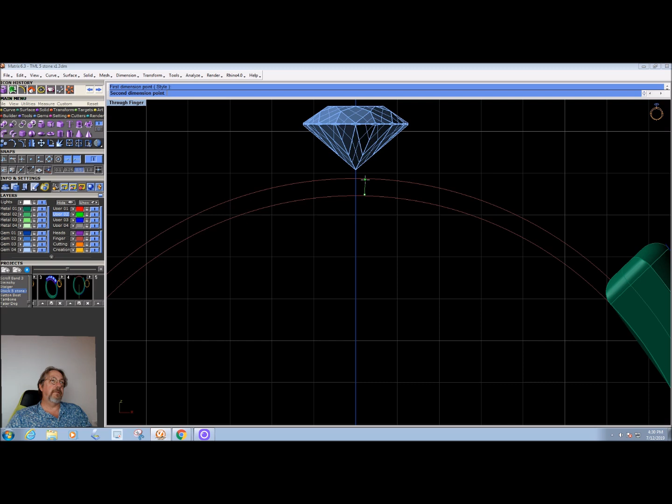One of the things I always do with rings like this is take my original ring rail, which is a size 6.5, and add one that's one size bigger. I make sure the culettes of my stones are always off of that, so that if I had to grind a half size or full size out of this, I wouldn't actually have to cut the ring, because this difference is actually pretty minimal, way less than half a millimeter.

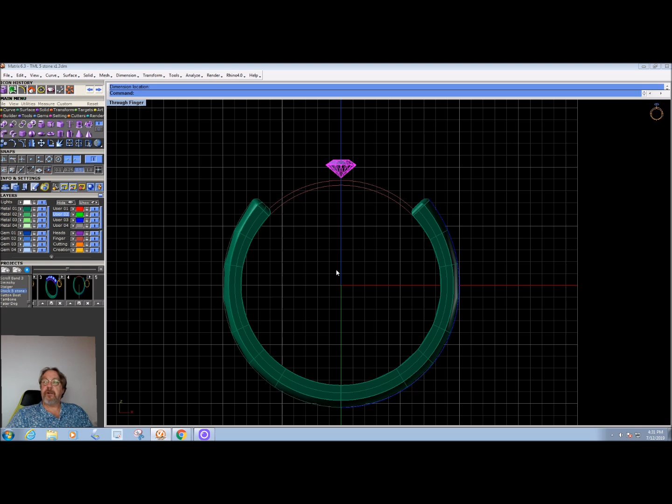So I actually think it's better sometimes to tap or grind rather than cut, if you're only going up a little bit, especially if this was a ring where the diamonds went all the way around. You'd have to either add a whole diamond or completely rebuild the ring. But doing it this way saves a lot of energy if the customer comes back in, maybe they've gained weight, or they're pregnant, or they want to change the finger size or something like that.

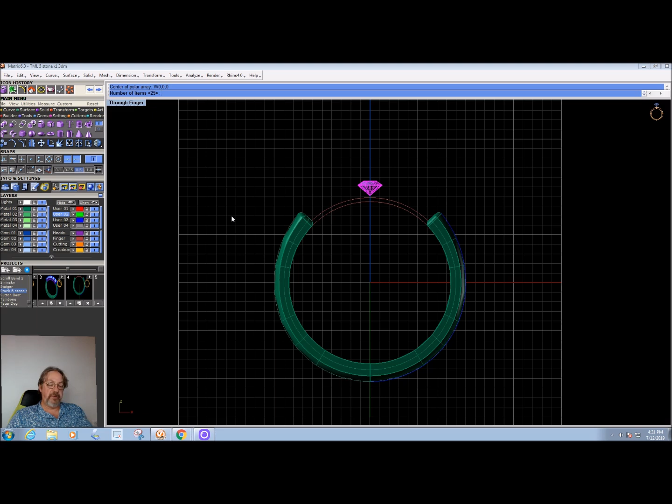So first we want to act like we're going to build this all the way around. I already know from the center polar array that 25 is the right number. Odd numbers are great for doing this because I've got a gap down at the bottom and a stone centered at the top.

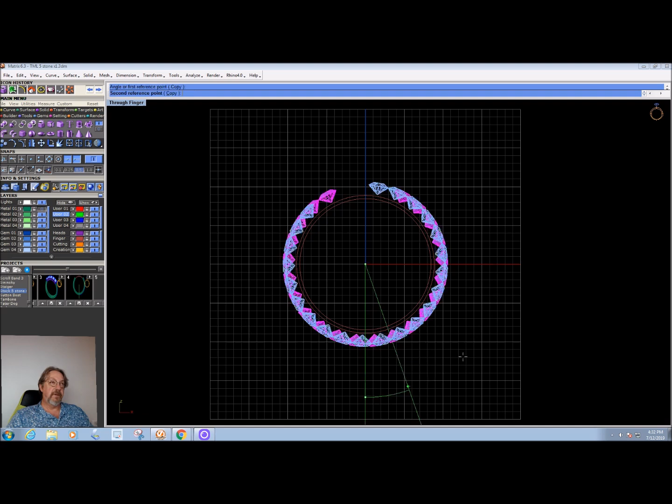The first thing we're going to do is turn off our shank. Then we're going to drop these for the moment - I'll actually be dropping a bunch of these soon. I'm going to rotate it upwards like this, and then we're going to build a prong.

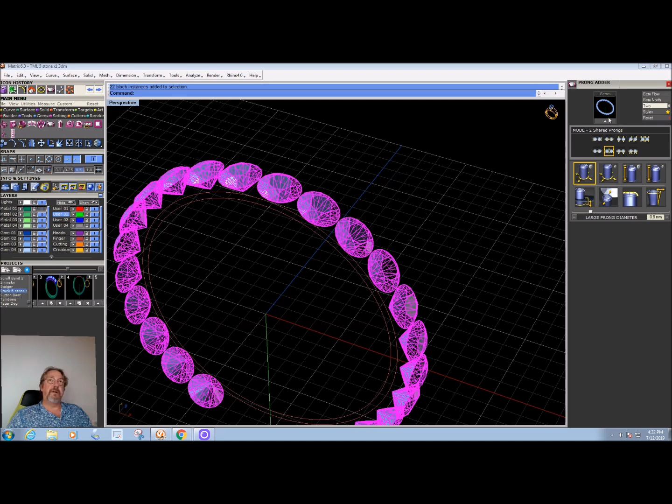Now, if I go in and use the Gem Vision Prong Builder tool - it says Prong Builder here and Prong Adder here, whatever - I'll throw these in here. We get these things, and you can play with them, but I think they're rather insufficient for holding anything.

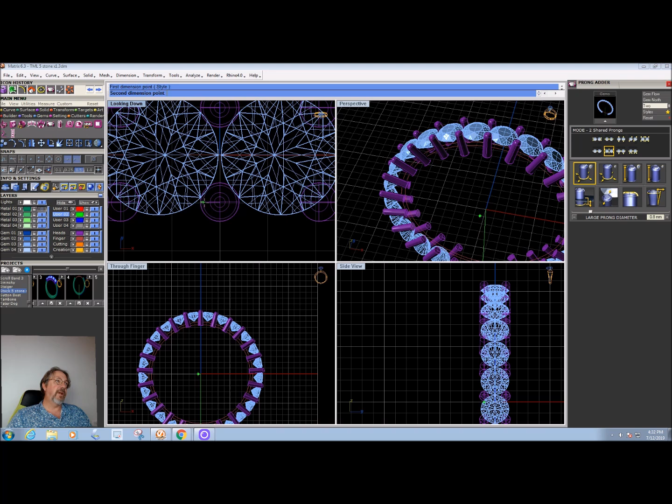We're looking at a diameter of metal that's, if we're lucky, 8 tenths of a millimeter. That's pretty insufficient in my mind, plus there's a lot of chance for porosity or casting failure in there.

So what I like to do is center up here and do an oval. We're going to turn on our grid snap, pop right to that grid, and do an oval prong like this. It doesn't look severely oval, just a little bit oval. I'm going to make a second one just like that, and then make this one a little bit bigger.

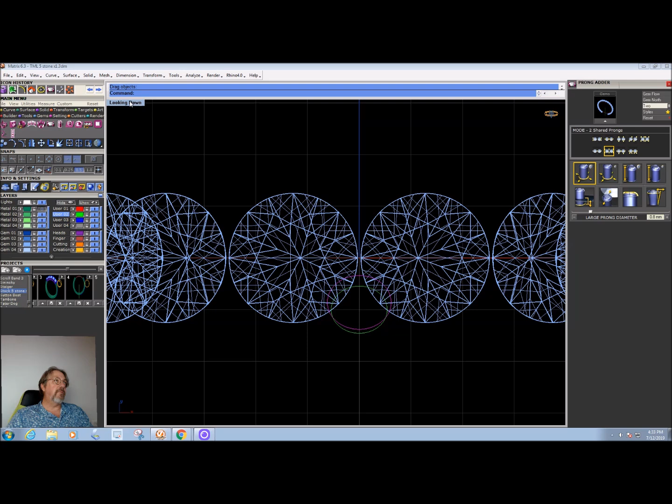And then I'm going to slide it in like that. We'll take these, and the base one, which is a little wider, we're going to slide up underneath our ring rail, and this one we're going to slide right above the table.

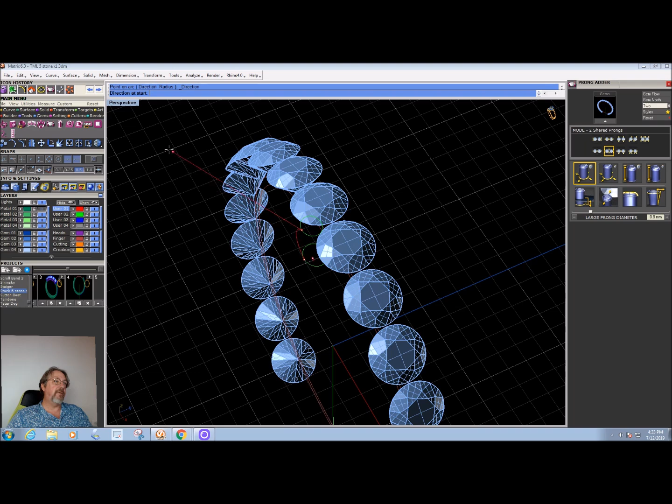And then I like to have a little arc to this, so I'm going to pop that and that with an arc tool and put just a little bit of an arc there. Then we will sweep surface 1 from here to here.

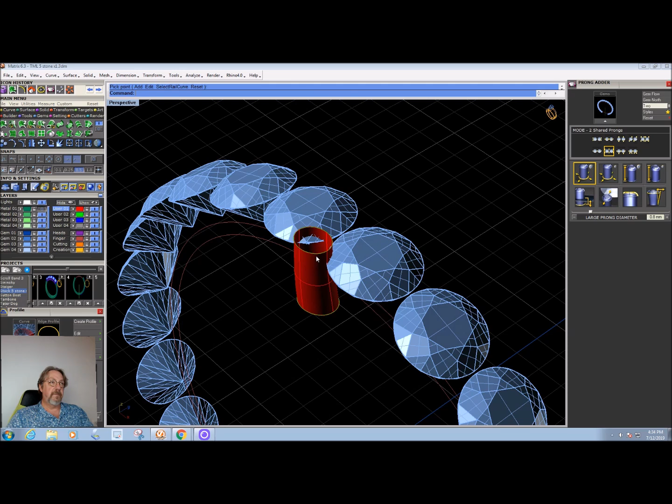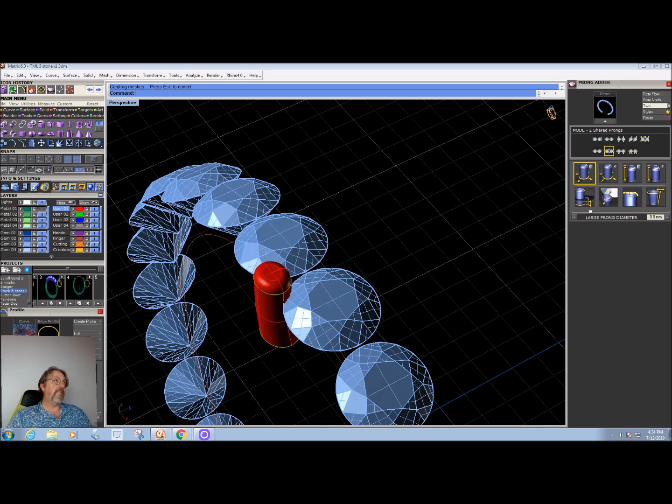Alright, so I like this because since it's a little wider at the bottom, I think it's easier for the metal to flow up. Since it's oval, I think it's easier to hold the two prongs. And honestly, once you finish it, I think it looks as good or better than any of the prong adder prongs.

So I'm going to take this - I guess the first thing I'm going to do is cut the finger rail off of it.

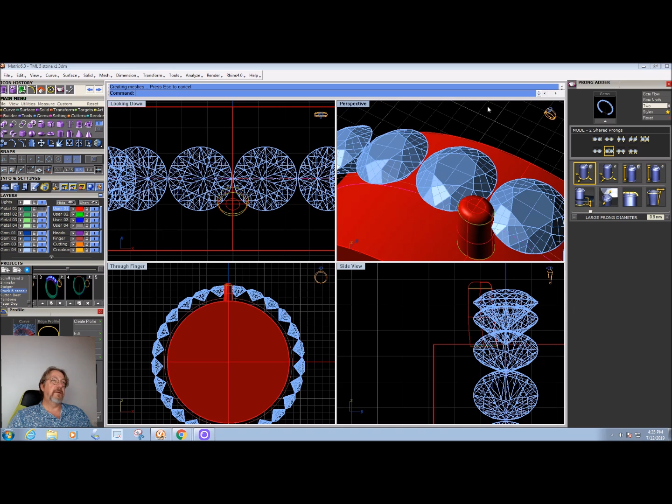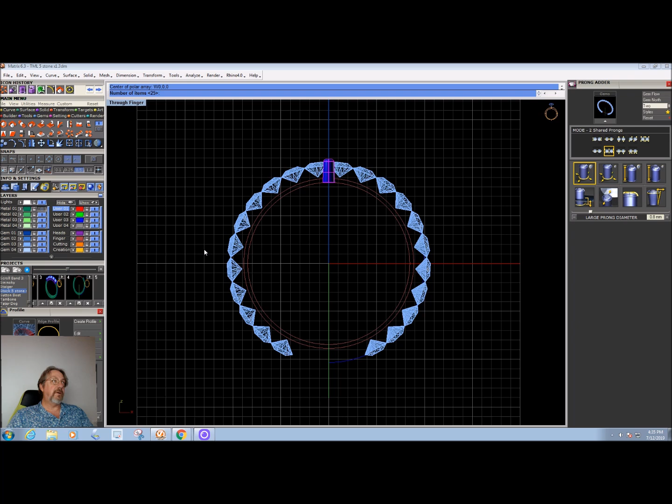Turn this blue. Now I'm going to transform by 4, 25. There we go. Look at those prongs, it's gorgeous.

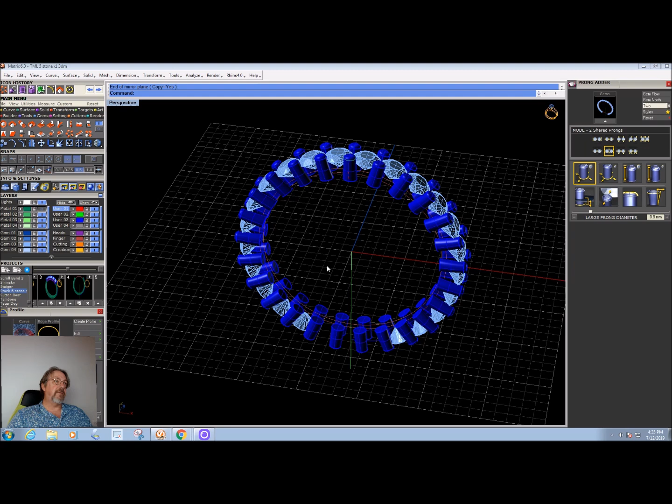And then we'll mirror them over for here. Now what I'm going to do is turn all this off and go back to my... turn it on. Actually, I'm going to flip this around. Turn these guys off. Oop, sorry, I need one. That one, so I'll get all these off.

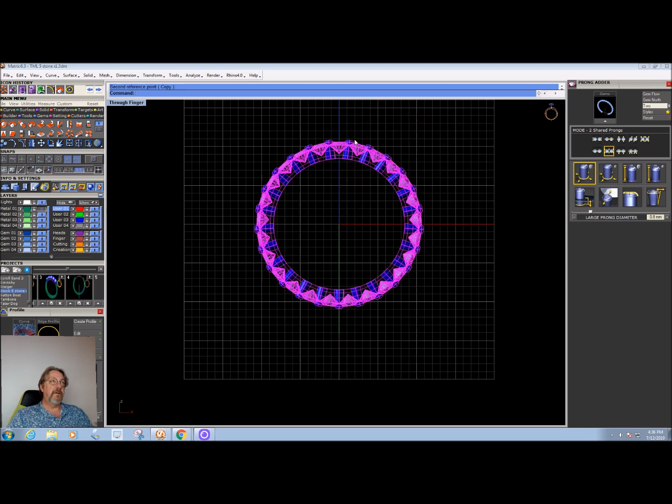Transform by 4. Alright, so now we're going to take and flip this entire thing over. And the reason I deleted those 3 on the bottom was so I could see what I was doing. That's the only real reason.

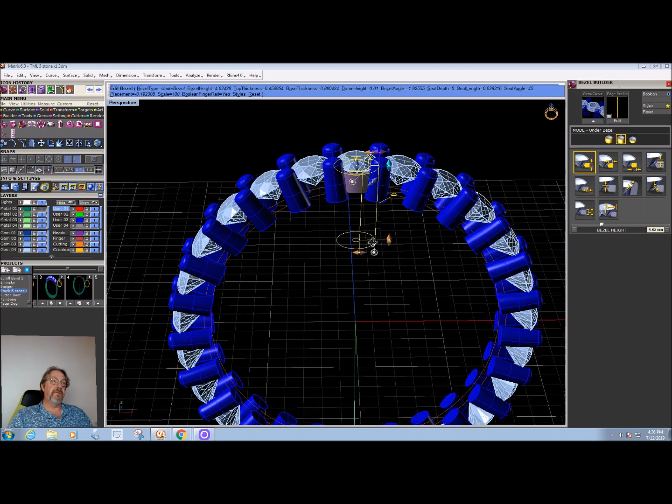So now we're going to go into one tool I do use, which is the bezel builder, although you don't have to. So we're going to throw this in here. I need an under bezel. There it is. Now the one thing I got to do here is delete my extra piece, my extra rail. I want this to come out a little bit.

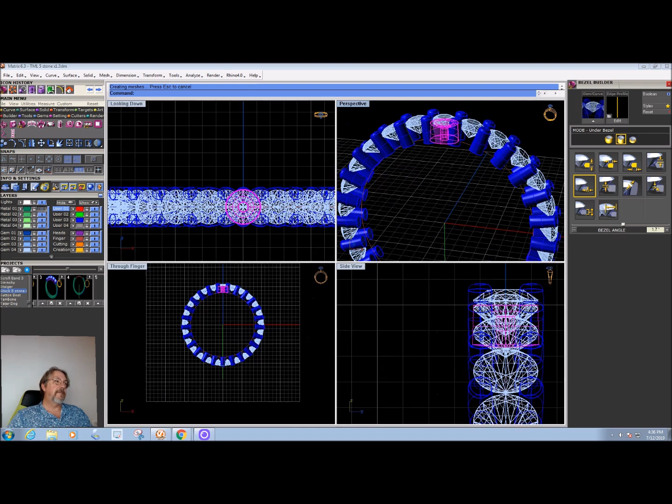Enter. I'll take this, which is a little heavy, but it's alright. And again, transform. And there we go.

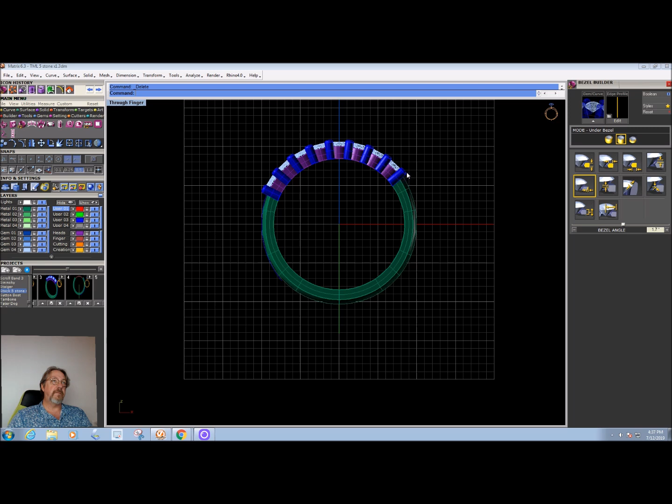So we're going to turn our shank back on and just delete all the ones we don't need. Oop, need that one. Alright. And so there we go: 1, 2, 3, 4, 5, 6, 7. Gorgeous little 7-stone ring.

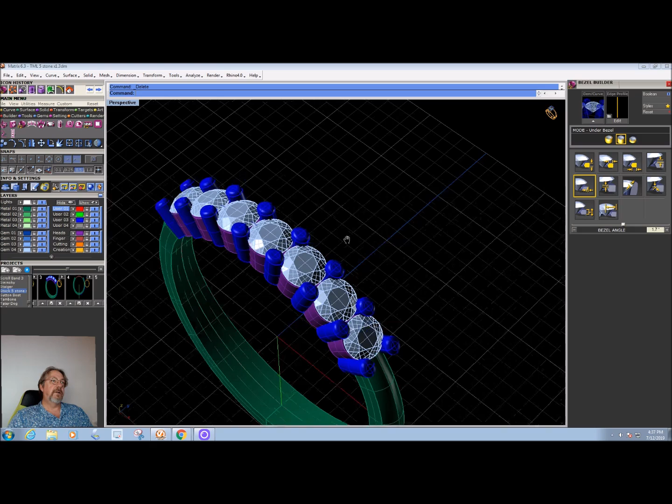I think this will cast quite well. I probably could fill this in here, but I don't really think it's necessary because we got plenty of overlap. So that's how I would do that.

Alright, Gary, let's see how you would do it.

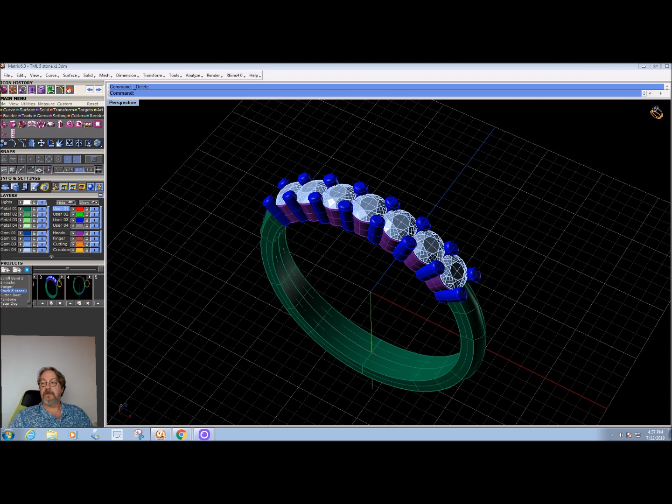Hey Joel, thanks for the handoff. I think this is probably going to end up being my favorite project of all the ones we've done so far.

I note that you started out with the shank already made, finger-sized curve and a gemstone, so I'm going to start out the same way.

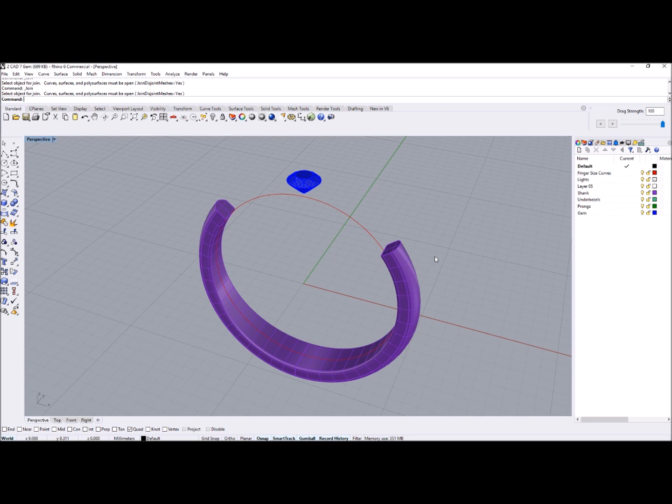In addition to that, over here in the panels, in the layer tab of the panels portion of the Rhino screen, I've created some layers too, and hopefully as I work through this I will remember to put stuff on layers so we get that nice colorful finish differentiating the components of this.

So I'll get started right away here. I'll pop over to the top viewport, use the circle command with grid snap on to make a 2.5 millimeter circle, then come down to the front viewport, and with the quad OSnap tagged, I will create a polyline that starts at the quad, and then use relative position in Rhino, relative negative 0.5 for thickness with an angle of 41 degrees.

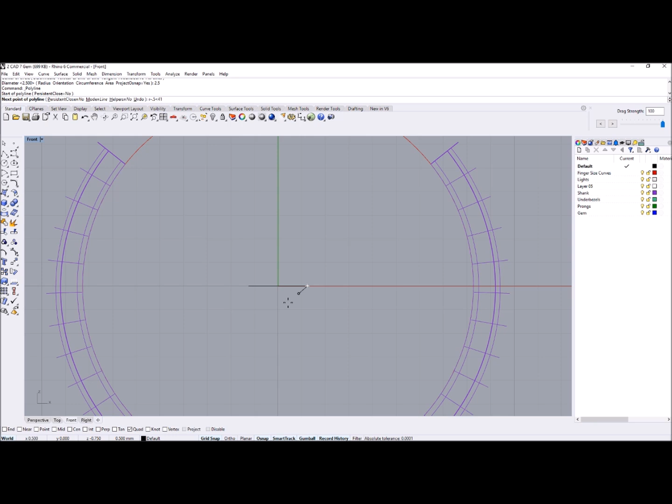Note that this automatically positions the second control point in this polyline at the same pavilion angle as a round diamond's pavilion. So this will make a perfect seat for that stone.

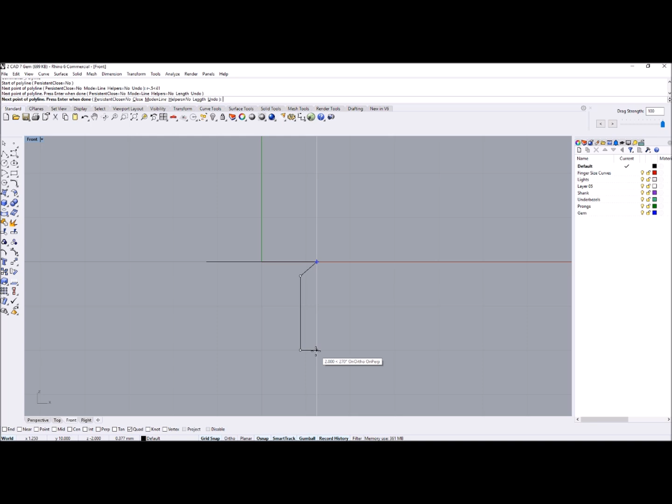Now if I shift constrain down here a little bit farther than I know it's going to need to be, and then turn on... I see Smart Track is already on here, so I'll hover over this point until it lights up, and that brings me a positional indicator here and a snap to, so that I am perfectly vertical from that quad position, and then I will come back up here and tag that.

Then I'm going to play with this shape just a little bit before I proceed, and that means I'm going to explode this. I'm going to rebuild...

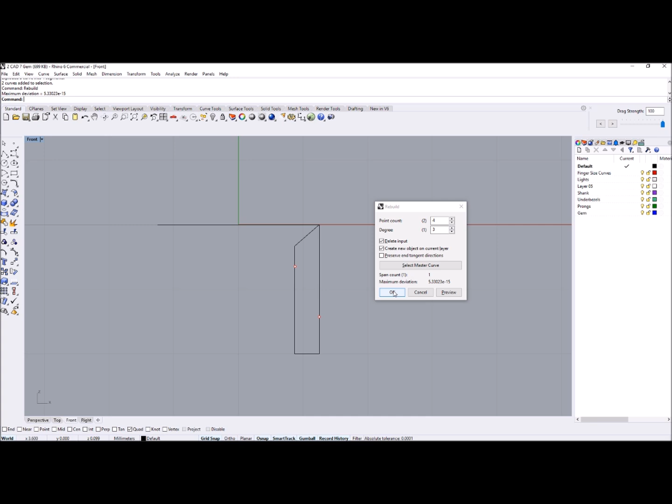These two lines, rebuilding from 2 control points to 4 for each of these lines with a degree of 3, which is going to give me the ability, once I turn on these control points, to bring this out into a smooth arc.

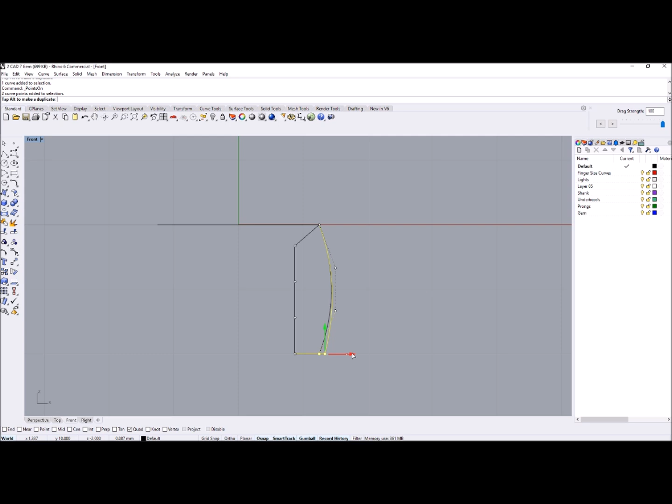And I had grid snap on there. I'm going to turn control points on to this line too, so that when I turn off grid snap and grab all of those control points, I can just bring this out just a little bit more. Yep.

And maybe we'll just continue to play with this just a little bit, to give this little barrel-like bulge that I want to do, and create just a little bit of tuck down here. You can play with that indefinitely, but let's accept what we got there.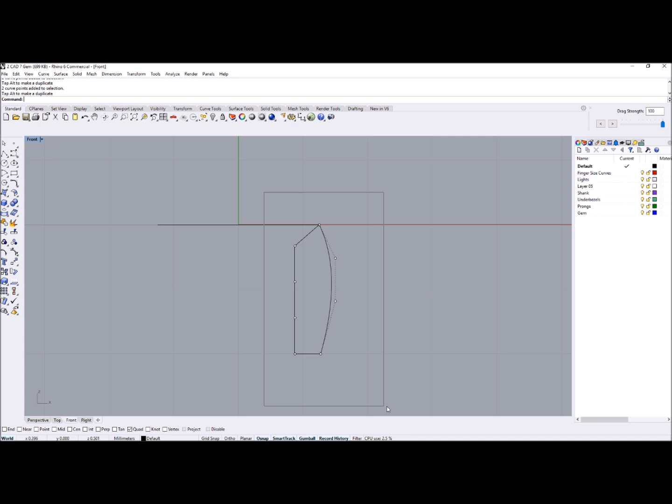I'll control join them back up, and then I will use the sweep one rail command, using this as a cross section to go all the way around that curve. And let's go ahead and put these

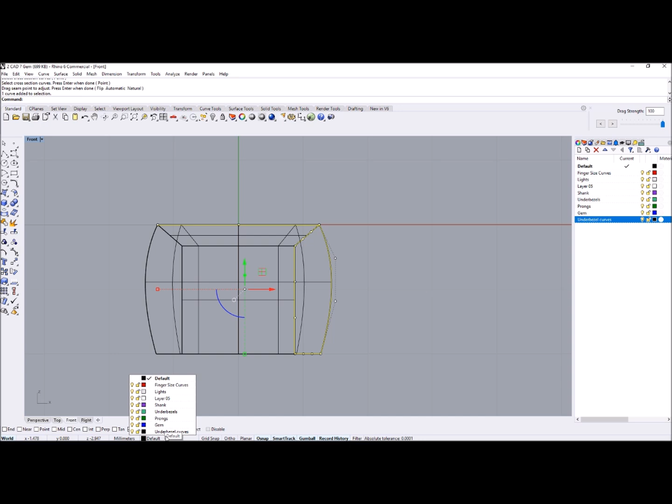curves on an under bezel curve. I didn't make that yet, so we're going to make a layer really quick. Under bezel. Boom, sorry about that. Under bezel curves. And we can then hide those because we really probably won't need them anymore.

Let's go down into perspective. And now I'm going to do one more thing here, two more things actually. We'll put that on the under bezel layer, and now I'm going to use the solid command to fillet edge, and I'm going to fillet this to 0.03 millimeter radius. Let's try that.

And I want to chain the edges, so all I have to do is touch this once, click on through to accept, and now I have a little bit softer edge on that, which I like, and it creates for a little better castability, I think.

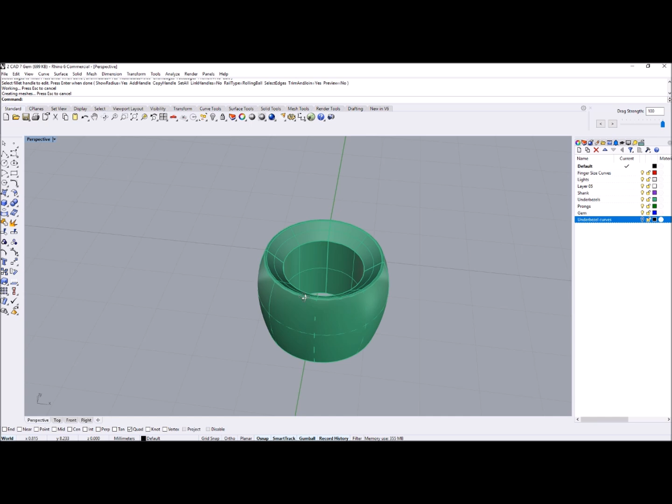Okay, let's come here, turn grid snap back on. In the top, we can just pull this down so that it's perfectly positioned underneath the gemstone, and we come to the front, and we can pull it up so that it actually acts as the under bezel.

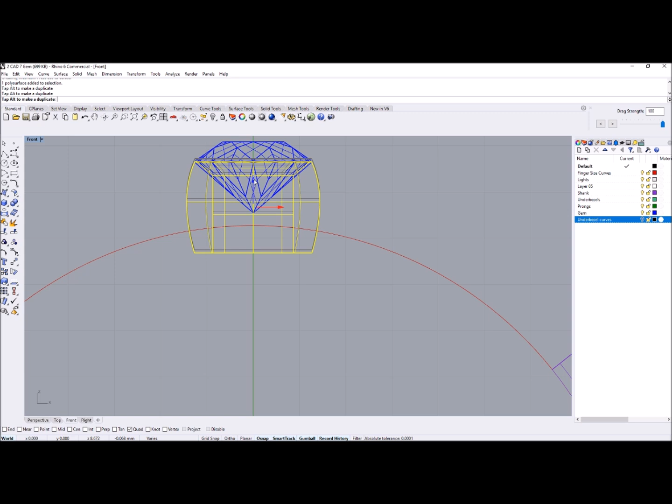See, oops, maybe what I need to do is turn off grid snap and pull that down to just right there, right at the girdle, right where it should be. Okay, perfect. And this does extend down into the finger space right now, but that's really not important at all.

Let's select these two things, and let's turn off our shank, and we can turn off the finger size curve. We really don't need it right now.

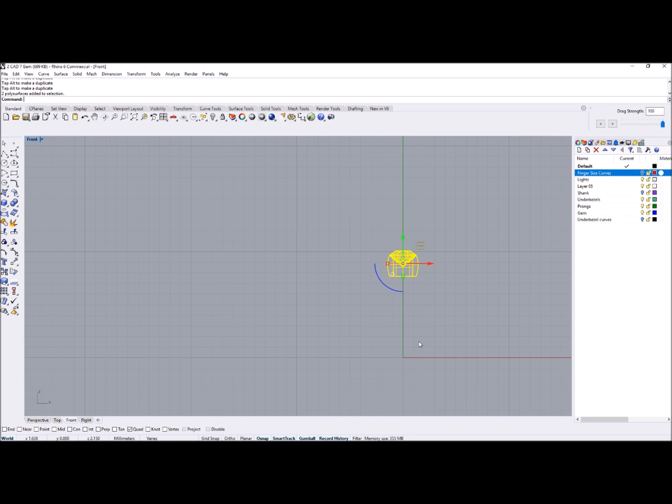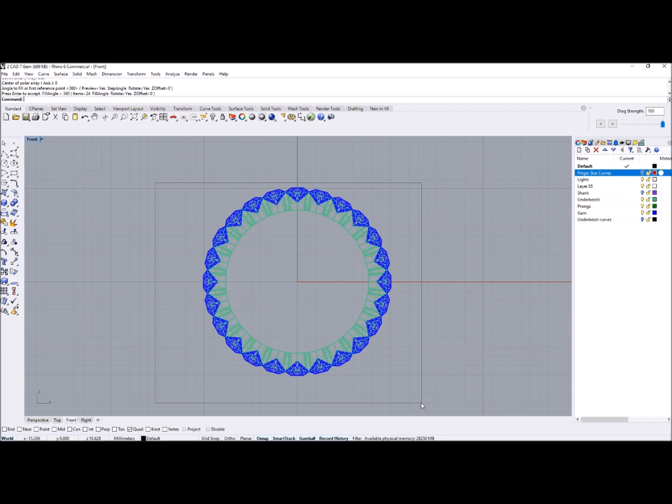And I like your polar array idea, so we'll do a polar array from the zero position, and I know that 24 is going to fit around here. I must have made my ring size a little smaller than yours, Joel, because I think you had 25, I have 24. But part of that is to explain that it really doesn't matter in this case whether we have an even or an odd number of stones. You can build this around any finger size basically, as long as the stones are going to fit around there.

And this is the slickest trick that I learned while working through this process of making this video. Something I knew existed in Rhino, but this gives me an opportunity to use this in a different way. If we touch the control or the rotate curve here that's built into the Rhino gumball, we can just move this manually wherever we want to, right?

So we could try and line this up so that it's between the gemstones, and we might be able to do a pretty good job. But there's a much more precise way of doing that.

And because Rhino does math, we can touch this, and we know we have 360 degrees in a circle. We've divided that by 24 sections, that's the gemstones that we laid up in there, right? But we only want to go half that distance in our rotation. So we do times 0.5 and watch what happens.

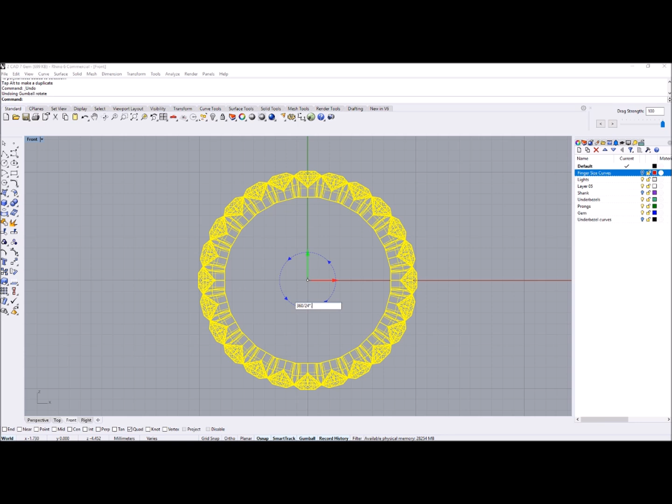Did you see that? Rhino rotated it, which I know is going to be 7.5 degrees because I can do math too. But if you have a more complex problem, you can just let Rhino work out the math for you, and that gives you the exact in-between position.

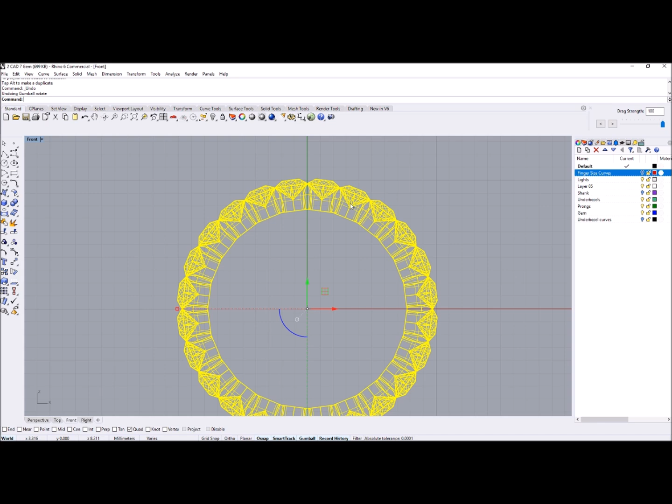It's rotated this whole thing to the exact in-between position, so that now we can go to the front or the right viewport and use the construction plane to build a curve.

Let's make sure that I don't have any O-snaps or grid snap on. I don't want that. So we're going to start just a little above the stone here, and I'm going to give myself 3 control points.

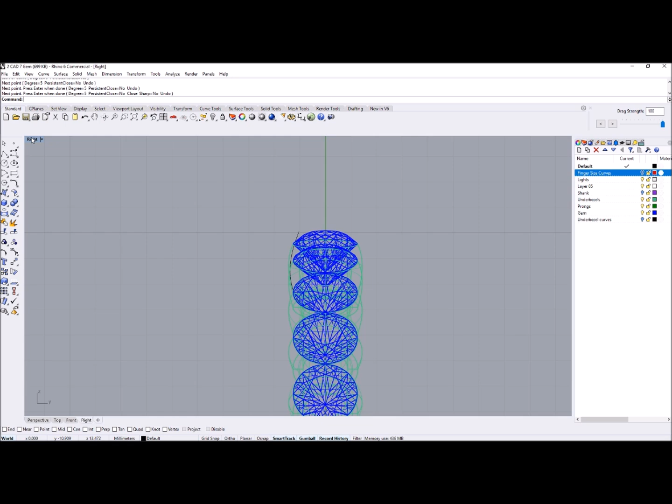And I want a little tuck underneath just a little bit here. So we've got our 3 control points. I'll end the curve there. Let's go into the perspective viewport again and see what we've got.

Okay, let's pipe this. I'll use a pipe with round caps, and we'll do 0.3 at the top, 0.4 at the bottom to give it the taper, which I really like your idea about, Joel, a lot.

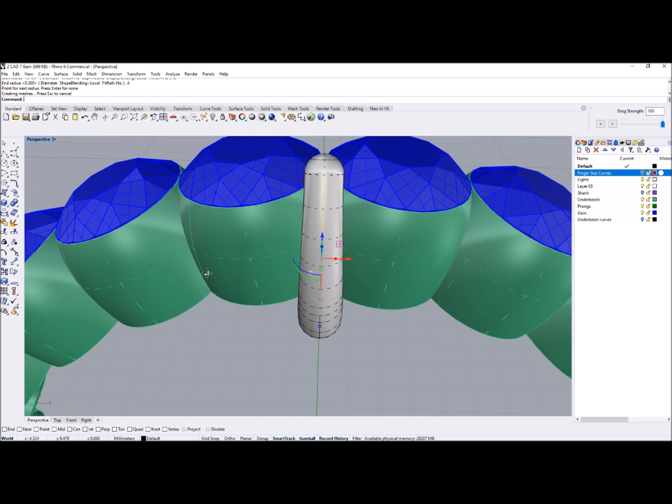I don't really want to work with this curve anymore, so I'll just delete it. Let's work directly with this. I love your idea of making this a little bit wider, so we just stretch it in the x-axis here a little bit. Let's pop back over here and see, we want these prongs.

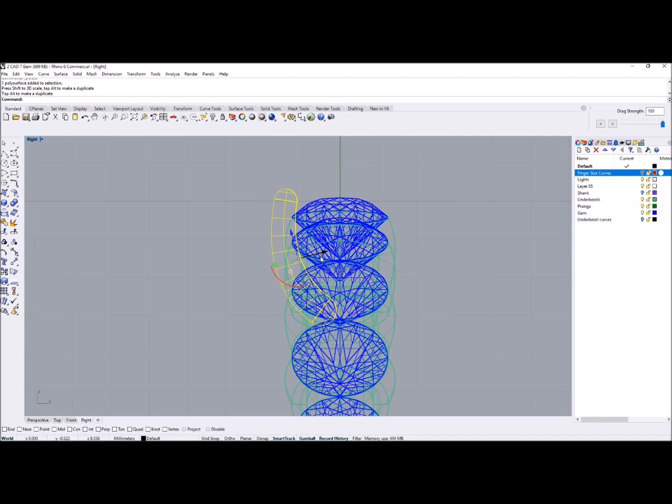What I really want to achieve is to get the prong to stand nearly straight up, but I also want it to tuck. That's what I was looking for right there. I want it to tuck kind of underneath, into the under bezel as I go around here. So I'm going to try and create just a little bit of an interesting feature if I can do that.

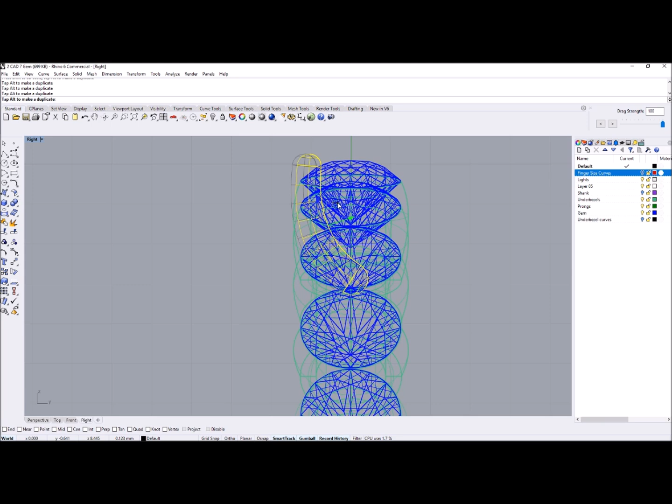Let's see, that's probably tall enough. Let's look at this in perspective view and see what we've got. Yeah, I like it. Okay, I'm going to make that prong even just a little bit bigger in the y-axis. Right, and that's probably about good.

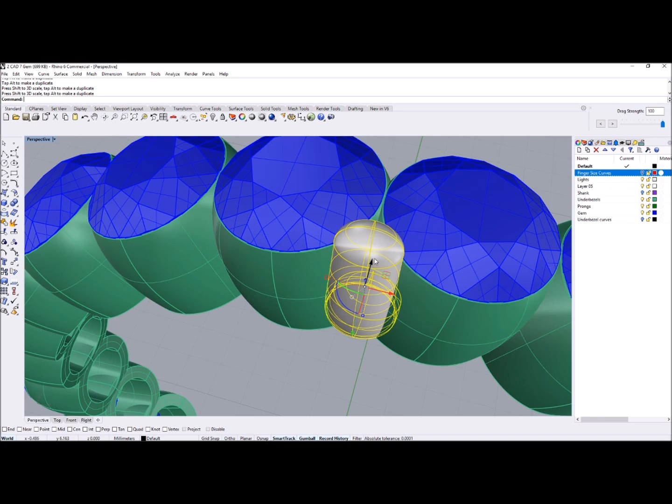Maybe I'll fatten it up even just a little bit more. But it's still a little bit longer, still oval kind of - longer in the x-axis than it is in the y-axis. A little bit more, and move it in.

Okay, and now you can see how it sort of impinges on the gemstone there. And I think I like the angle pretty good. Okay, that's good, and I'm going to get the tuck I want out of this.

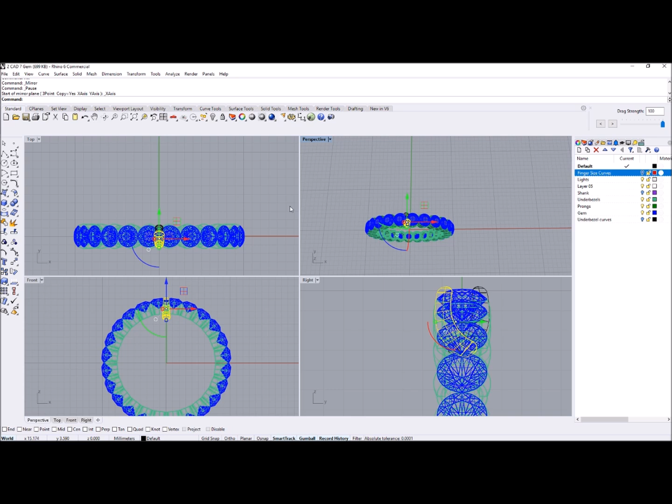So now we do mirror this in the x-axis to get its sister over there. We can touch shift select so that we have both of these, and we come down here and do the same polar array that we did for the whole shebang so far, starting at the 0 axis, doing 24 of them, click through to accept, and there we have it.

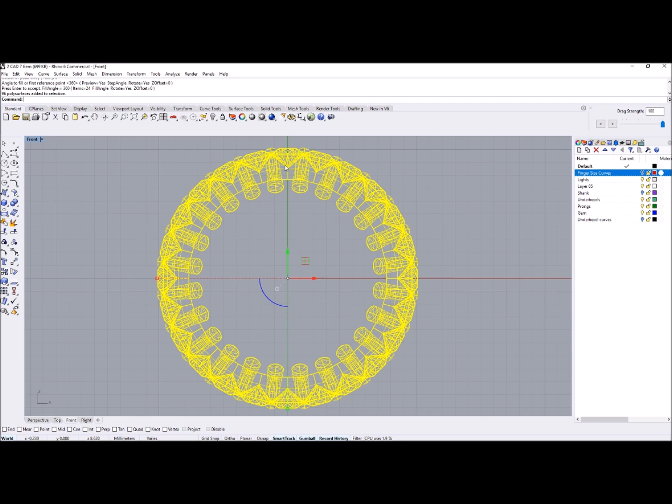Now really all we have to do is eliminate - oh no, we got to rotate this back. Okay, so we could do that formula again, but we know that formula is already there, so we can just do it again, and it rotated it right back to the middle. That's the 7.5 degrees we were talking about.

Okay, now we can go 1, 2, 3. We want that prong. So if I'm really good here, I should be able to select all of that stuff with one fell swoop and delete it. We bring back - oh, we don't need the shank yet.

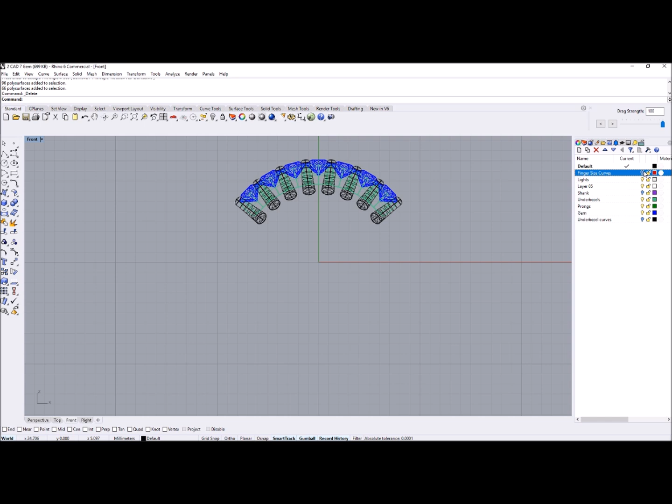What we need to do is bring back this curve, and we need to trim this stuff. I can do that by just extruding with the gumball. I can cap this thing with a simple command, and then I don't need that curve anymore.

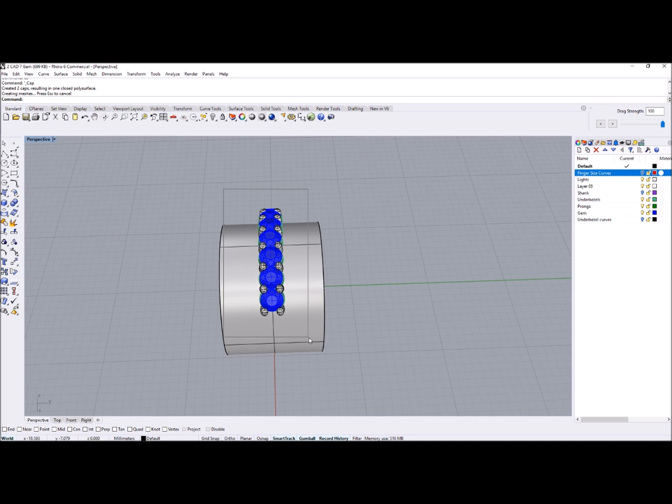I can select all this stuff, do a Boolean difference using this, boom, and I could have had Rhino delete it, but I didn't, so I'll do it manually. And now all I have to do is bring back the shank, and we're done.

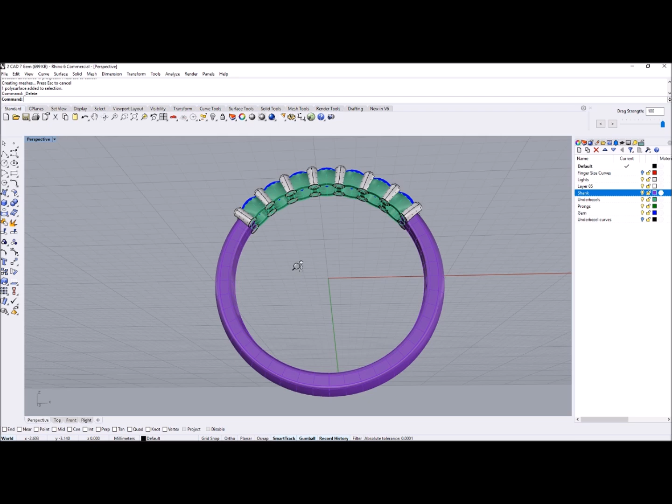There we go. Now, I think I could have rotated those prongs just a little bit more, but I like it. And if I was making this for manufacturing, I'd probably go back in and fillet some of these edges to soften them around. But this is as far as we're going to take it for the video.